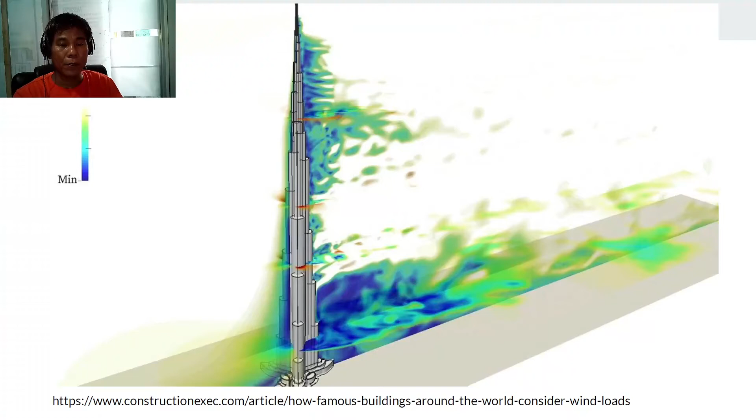Aside from that, strong wind. Winds can be simulated using computational fluid dynamics. Then after that, we use a wind tunnel test to finalize the design.

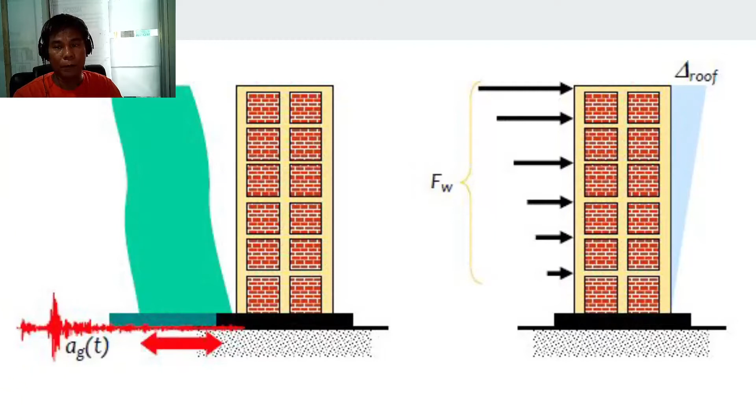Aside from that, we have what I call the terrorist act. The Twin Towers in New York collapsed in 2001 due to the jet plane that hit the building. It was intentional, because there were two buildings hit one after another.

Aside from that, the building collapsed due to explosion and fire. So these are the man-made forces.

Then with these loads, if we apply these natural and man-made loads to the structure, there will be some load effects, reactions. If you apply the force, there will be an equivalent reaction. And what would that reaction be? It's about the structural effects or load effects to the structure.

It is in terms of, to simplify it, tension force. Tension means pull, you pull it. The material will stretch and lengthen, it becomes longer.

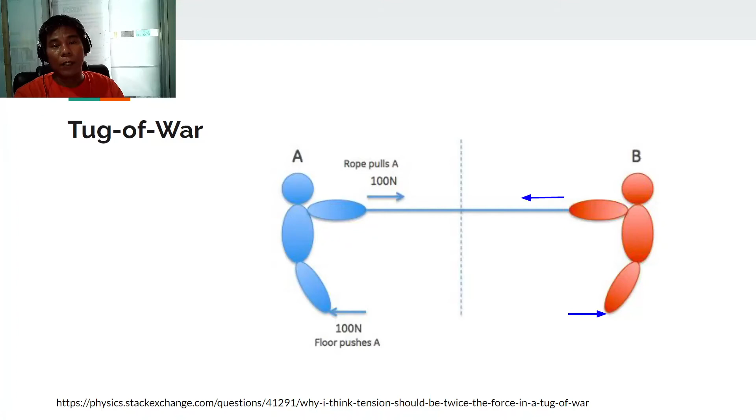Just like the tug of war, as you can see, the two persons A and B are pulling each other. So they are pulling with a tension force.

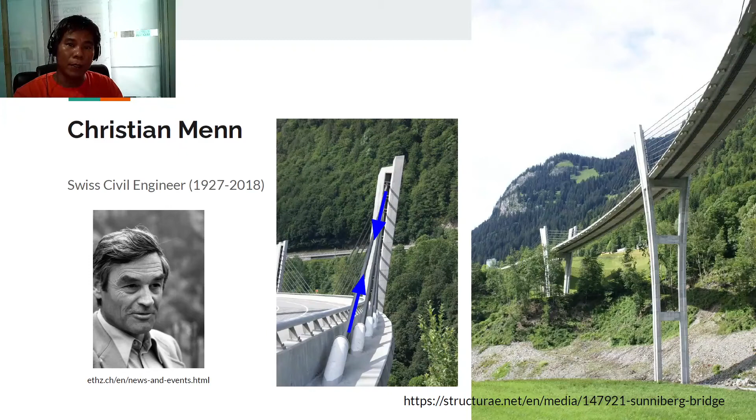This is usually applied in structural engineering in terms of the cable-stayed bridge, the Sunniberg bridge. Also with the Brooklyn Bridge, this is a suspension bridge, so it carries tension.

I want you to read the history of the Brooklyn Bridge. It's really a nice story, maybe a bit of a sad story, but at least they were able to construct the Brooklyn Bridge. Imagine the midspan is almost half a kilometer, 486 meters, in 1890.

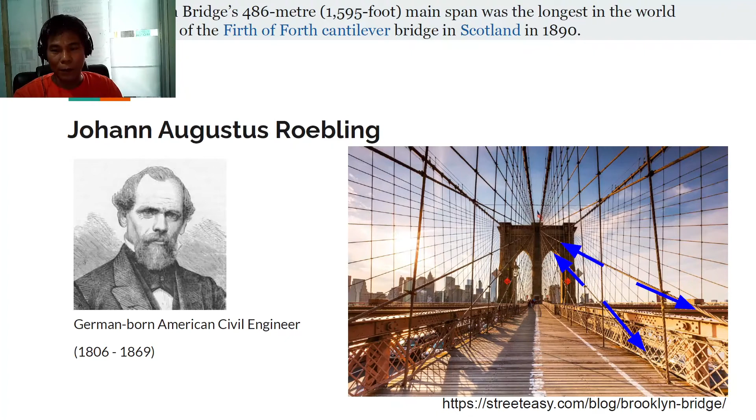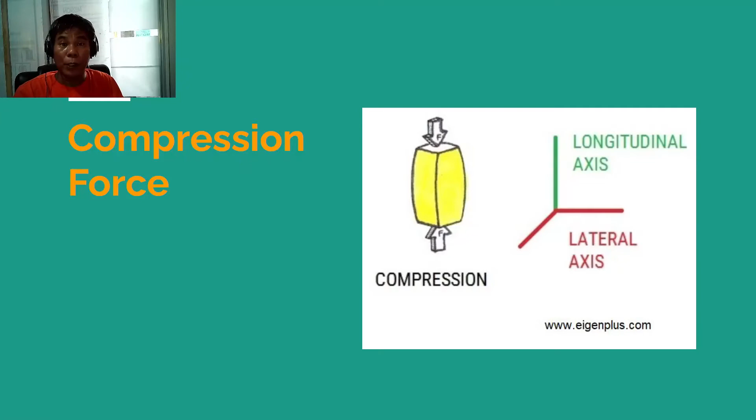Aside from tension, we have the compression force, which is a push. With compression, the member will shorten, it becomes smaller as you push it.

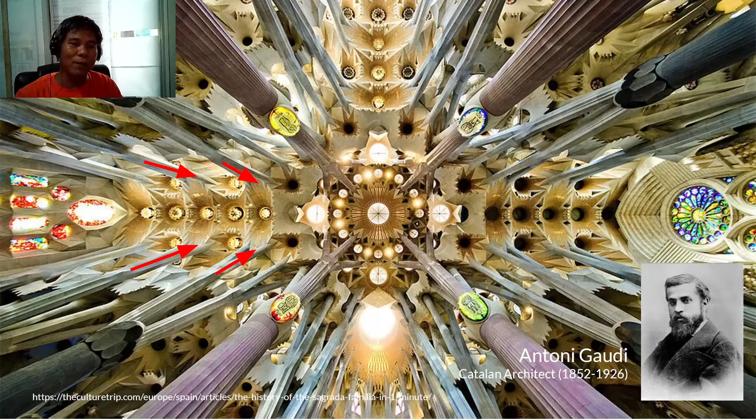So this shape of the hanging chain was used in designing the columns of Sagrada Familia. It's really beautiful actually. The idea came from Robert Hooke's hanging chain, which forms a catenary in tension under its own weight.

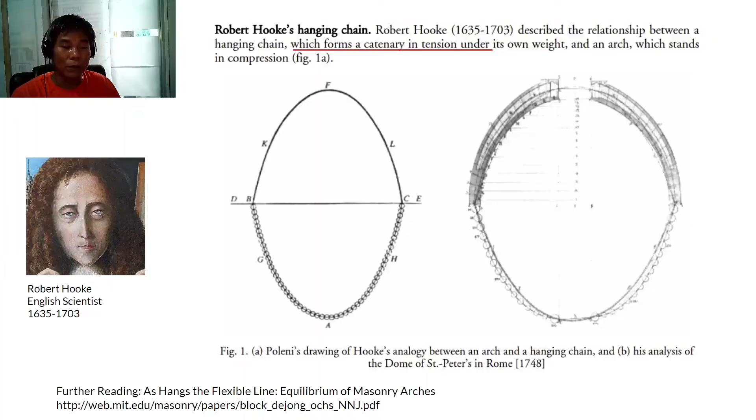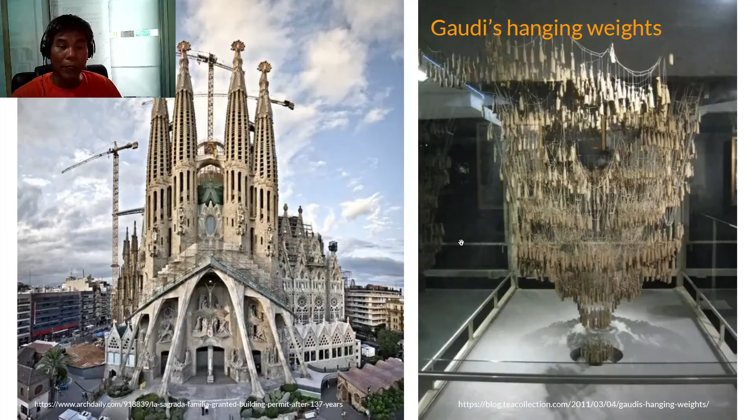So here is the concept used by Gaudi: tension, then when you flip it, it is now compression. It becomes an arch, right? So we have the tension structure and the compression structure, which is an arch.

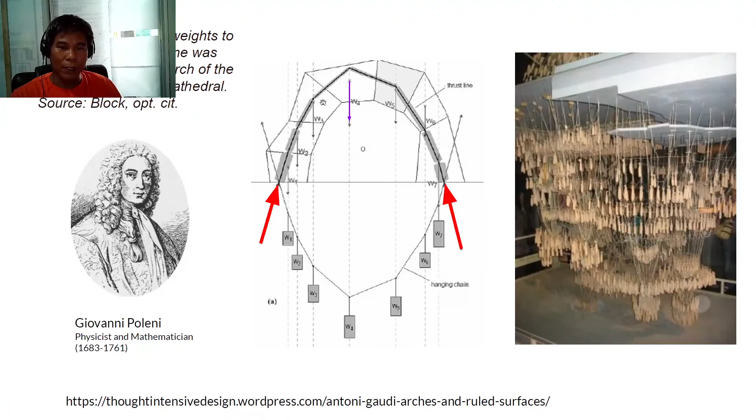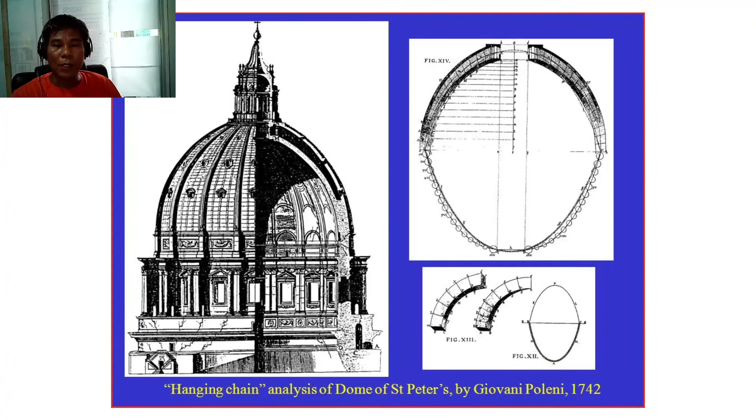It was also used in the design of the dome of St. Peter's in Rome, the Vatican. Aside from that, Heinz Isler, a Swiss structural engineer, actually had this experience during winter.

He observed that if you have a cloth hanging, and it becomes icy during winter because it's cold, what he found out is that when you flip it over, since this is purely in tension, when you flip it, it becomes compression. Just like this example, this is tension as a hanging cloth, and then when you flip it over, it becomes compression.

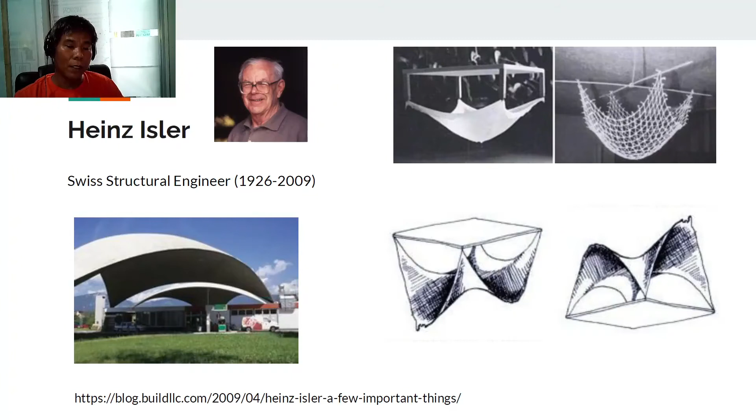So these are the things that Isler made. This is a shell, a 3-point support shell structure, which is purely in compression.

The same is true with the Italian engineer Nervi, he also used the same concept. It's like a basin, when you flip it over and fill it with water, of course it becomes tension. So when you flip it over again, it becomes compression. So most of these structures are in compression.

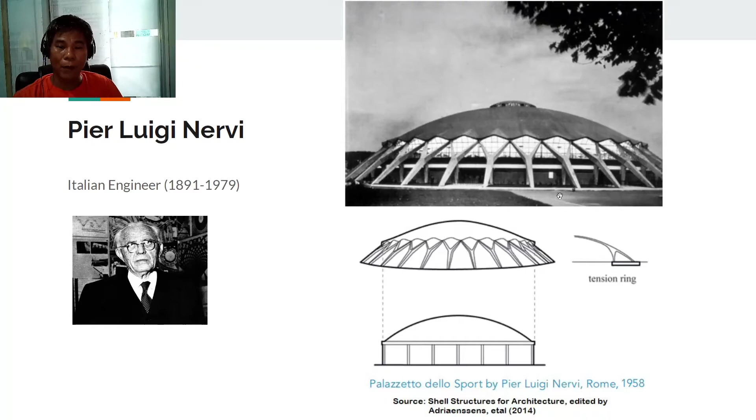Except, of course, the portion holding the supports, because these are in tension. We call it the tension ring. So even if you can't really see it, as long as you have the tension ring, this is quite stable, because the tension ring holds it, going around the structure.

Also, we have the Salginatobel Bridge, designed by Swiss civil engineer Robert Maillart. This is an arch bridge, as you can see, which is in compression.

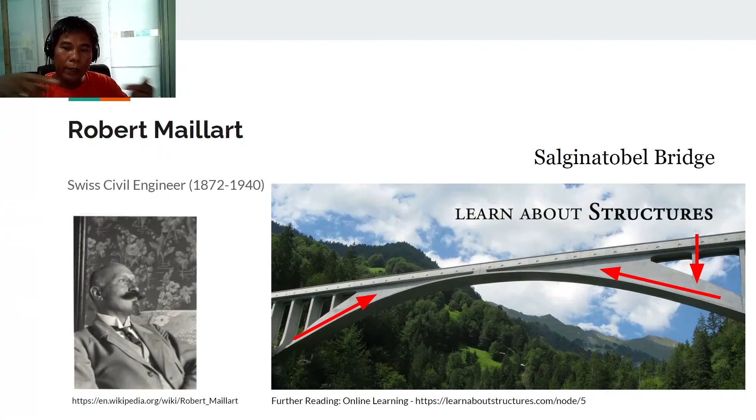This concept is also used in the flying buttresses of churches in Europe. The churches in Europe are tall but thin. If the wall alone had to carry the load, it wouldn't be able to withstand it. So it has to transfer the force through compression to the other side.

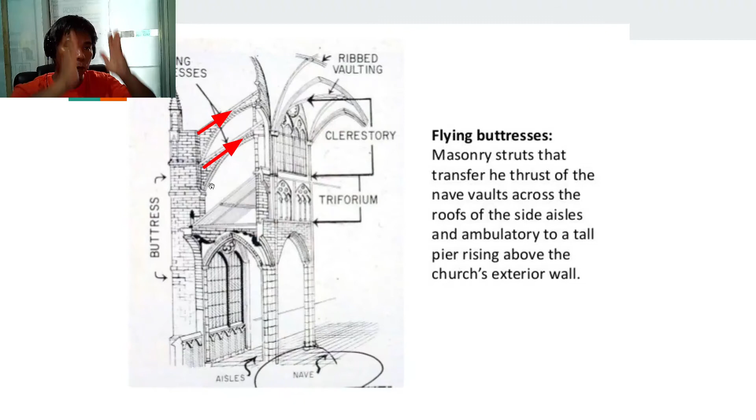Also, I mentioned last time, it's much better if everything is in tension. That's the efficient way of using material if your material is good in tension. But if your material is good in compression, then it's better to make the structure all in compression. But there are also structures that are both in tension and compression.

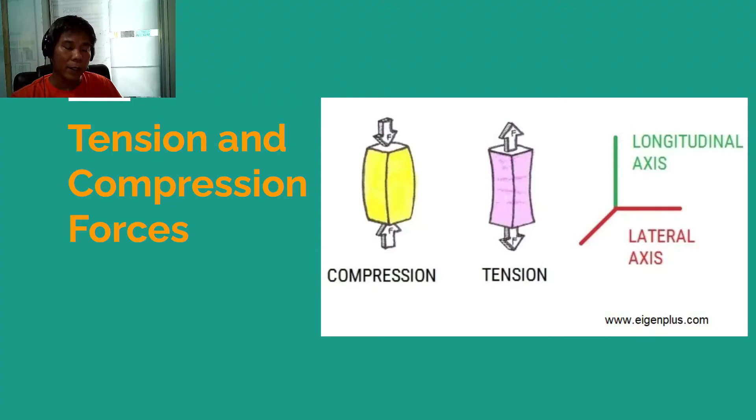You can't avoid that in man-made structures. These two will always complement each other, the tension and compression forces.

Just like this truss, this is a unique truss in Central Station, Berlin, the Berlin Hauptbahnhof. As you can see, the curved portion carries the compression, and then the opposite midspan is in tension, and also the outer part is in tension. As you can see in the computer modeling, you can see the effect by applying the load. So that's why they were able to design it in that way.

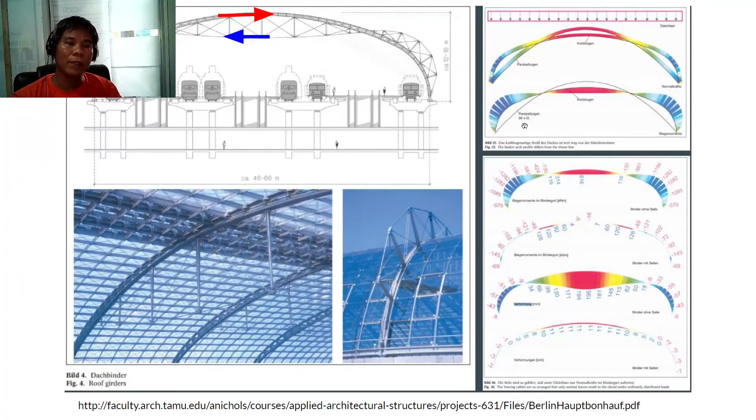Aside from that, we have tensegrity. This is what I'm saying, tension integrity. Tensegrity is short for tension integrity. The structure is actually stabilized by tension and compression.

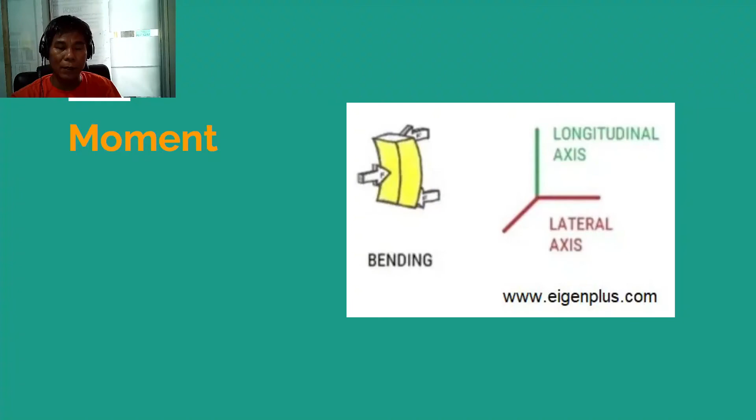Aside from that, we have the bending moment. Bending is when you pick on it, you will bend the structural member. One example is a pole vault.

As you can see, look, it bends significantly. But since the pole was actually designed to carry that load, it works.

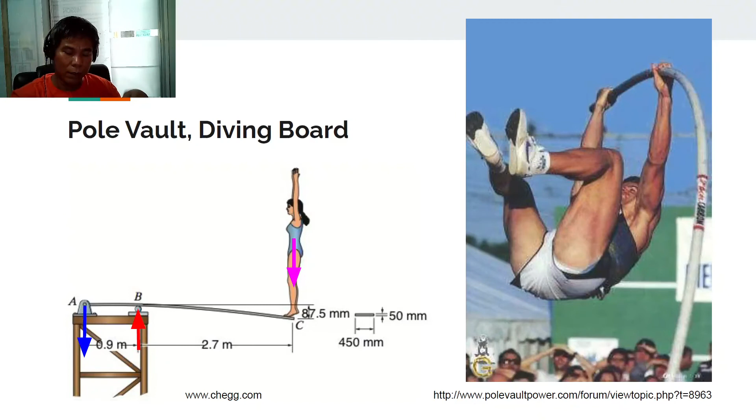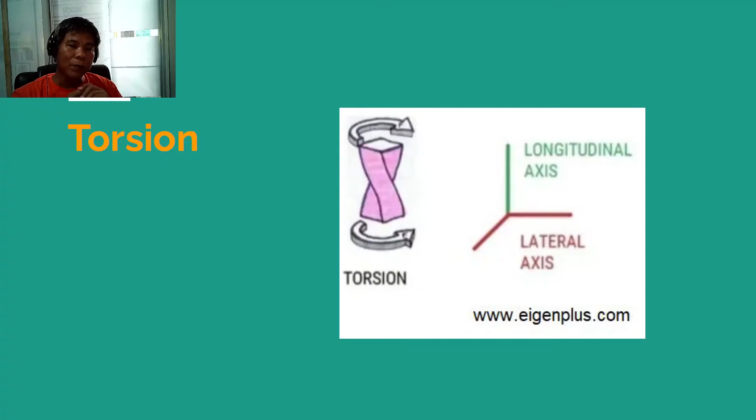Aside from that, we have torsion. Torsion is like wringing a cloth, you twist it. You twist the building or structure.

We have this Turning Torso designed by Santiago Calatrava. He's really a well-known architect in Spain. The Turning Torso was inspired by a human torso. Actually, the tower was designed to appear as if in a state of torsion.

This is not actually in a state of torsion. Actually, it is not, but the appearance is a good example of what would happen theoretically if a turning force was applied to one end of the tower. The uniqueness of the human body is that our bones and muscles can carry tension, compression, and bending, but they are not really good in torsion.

So that's why this Turning Torso is not really in intense torsion, but of course if there were wind forces on this side, then it could potentially twist.

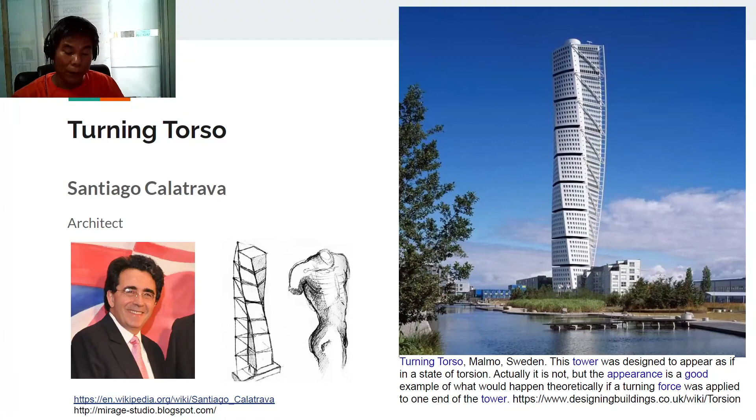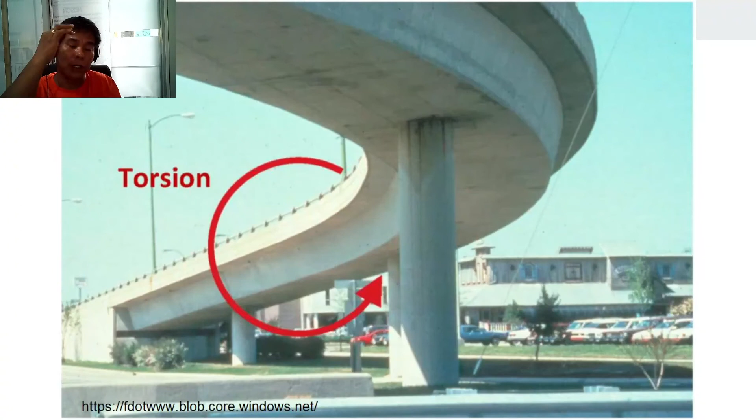One of the most common examples of torsion is this bridge. This curve twists. So it experiences torsion, this one. It can't avoid it, it has torsion. Aside from torsion, we have shear.

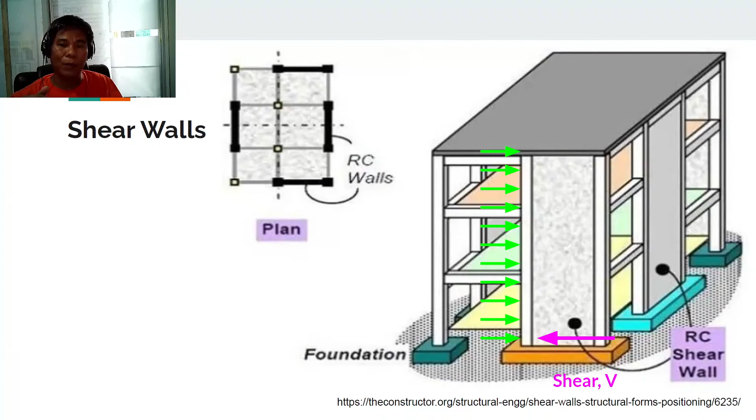Aside from that, we need to learn from failures, especially construction failures, so that when we design, we will be able to design efficiently and effectively by learning from our failures.